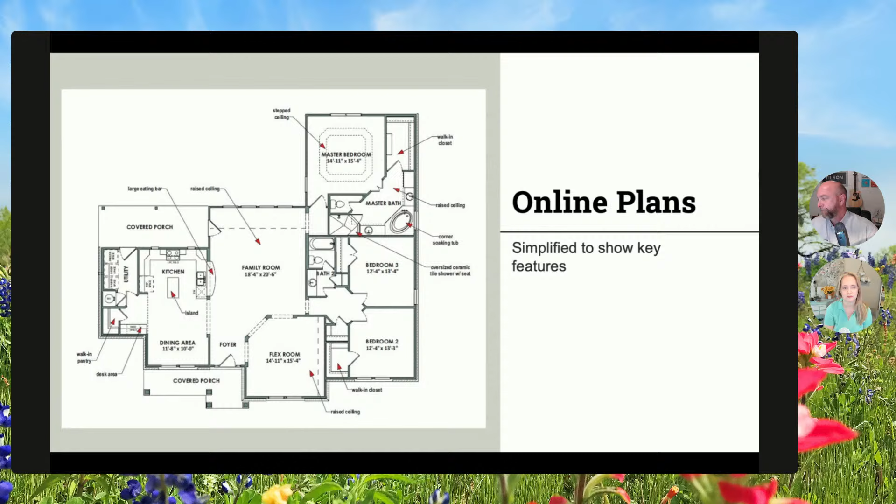Anyway, it's kind of a watered down version of a floor plan to keep it from getting cluttered, and you can still make sense of it when you're starting your journey and dipping your toes in. So you've got your callouts in there telling you all the special features.

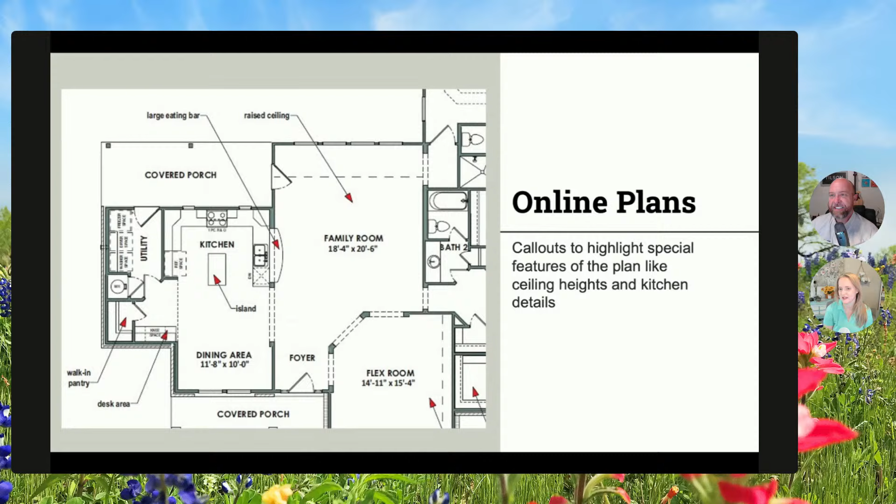Okay, so exterior walls. This is going to be true on any version of the floor plan you're seeing, but there's a little bit of a code to what those lines look like. If you're just seeing a solid black line, that indicates Hardie siding of some type on our plans.

Could be vertical siding, could be board and batten, but this indicates siding only on that exterior wall. Down below where you see the hash mark, that little diagonal mark, that indicates full brick.

That means from the bottom all the way to the top of that exterior wall is going to be brick. There's actually an extra ledge we place it on because we're using full-size masonry for that. The one below, where you see the little squigglies, that is full stone, differentiated from brick in this manner. That wall is full stone on the exterior, from bottom to top.

And then beneath it is how we indicate a masonry wainscot, shown as a straight line on that edge. What that means is at a certain point on the exterior wall, we switch over—starting with brick or stone at the bottom, masonry—and at some point on that wall we switch over to the Hardie siding, or it could also be stucco. This is indicating a wainscoting.

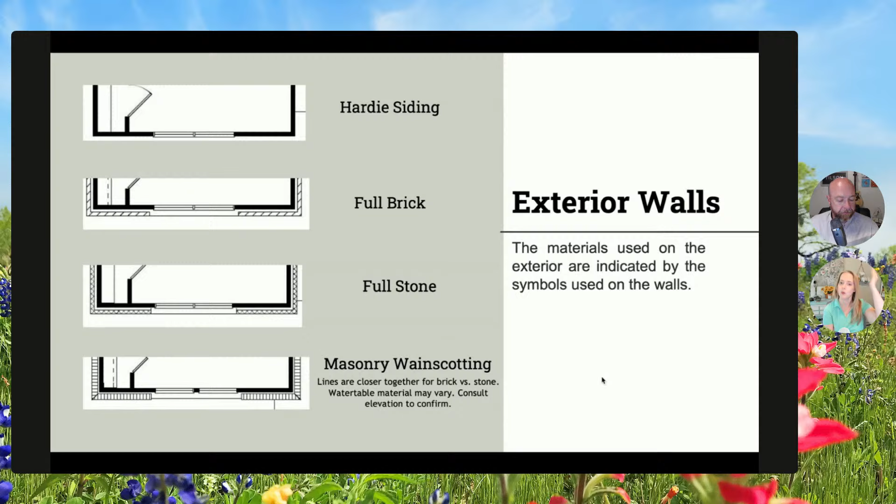So that's everything you'd see online. When you come into one of our locations, your consultant is going to pull out what we call the work copy—I think that's a more universal term. This adds in a little bit more detail. It's not something we send home with you for further review, because if it gets to the right person, they could actually start building the home off of these, so they are copyrighted materials. But this does give you more detail about what's going on in the floor plan, stuff we don't want to clutter it up with online.

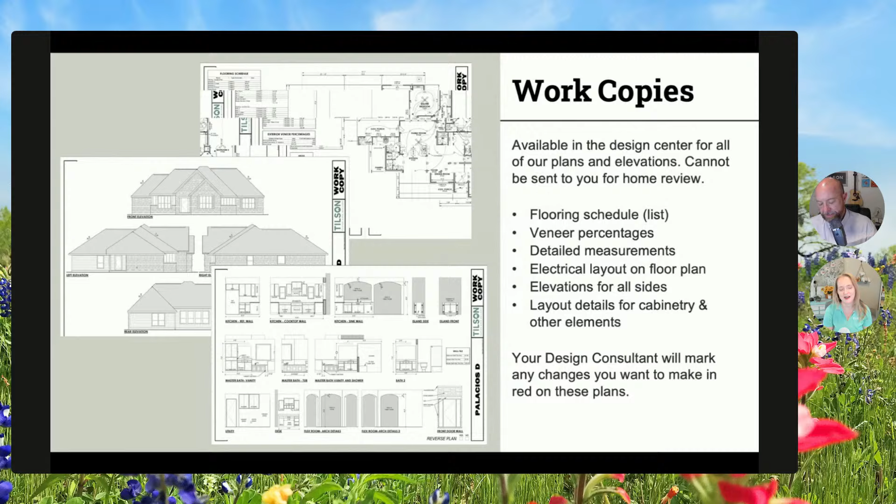So a little bit more detail. That flooring schedule I was talking about breaks out room by room exactly what flooring material is included in the plan.

It also tells you the square footage for each area, because we ultimately use these to order all the materials for your home. It's grouped by type of flooring, so everywhere that's carpet is listed together, everything that's ceramic tile is listed together. If you change that later and want wood or LVP, we'll separate those out as well.

The second thing you'll see is an area chart, telling you the square footage of the slab, broken out by heated and unheated area. The first floor livable area is the actual space within the home that is heated and cooled, the part within your HVAC. It's very antiquated, they call it heated and unheated, but those are the areas we're cooling, which you care a lot about in Texas.

We also break out the unheated area for this home, like the front porch slab and rear porch slab. If it had a garage, that would also be included, line itemed separately. We total up both sections and give you the grand total slab square footage. If someone asks about cost per square foot, ask a builder which one they're using—livable area or total slab square footage—because there's quite a difference, about 200 square feet if you add those porches back in.

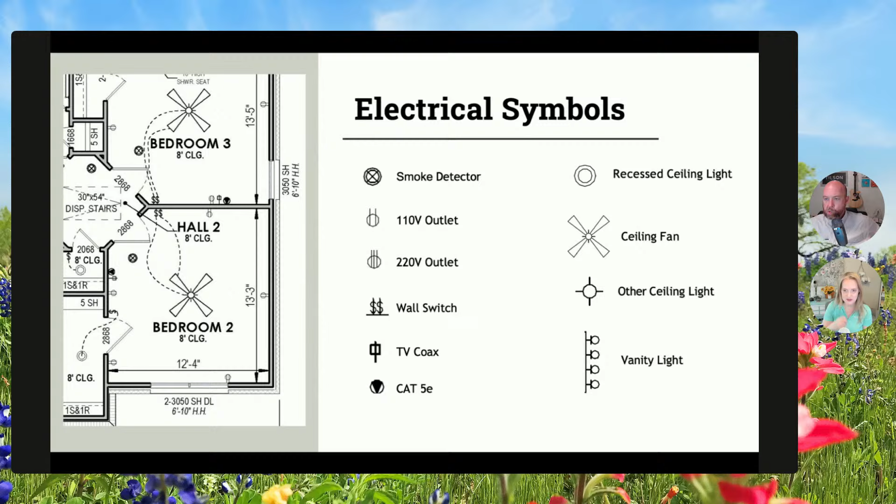We'll also indicate our vanity lights with that little indicator, and however many little circles you see shows how many bulbs there are in that vanity light fixture. Very cool. All right, windows.

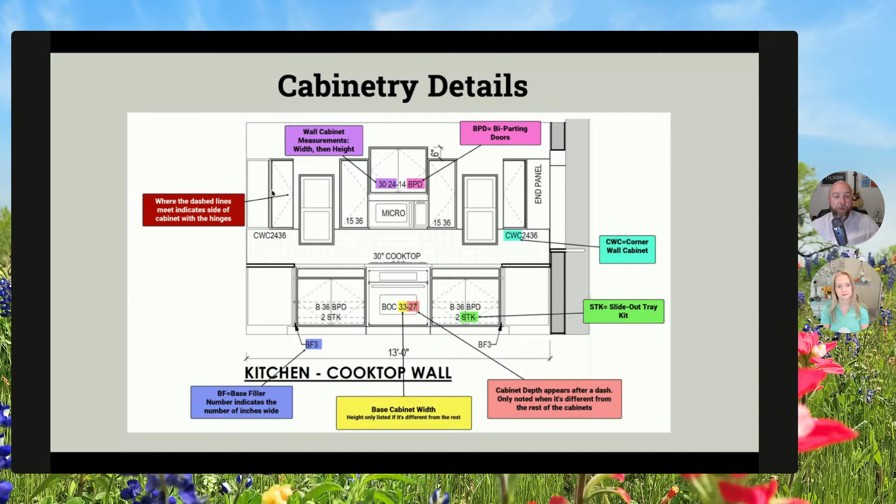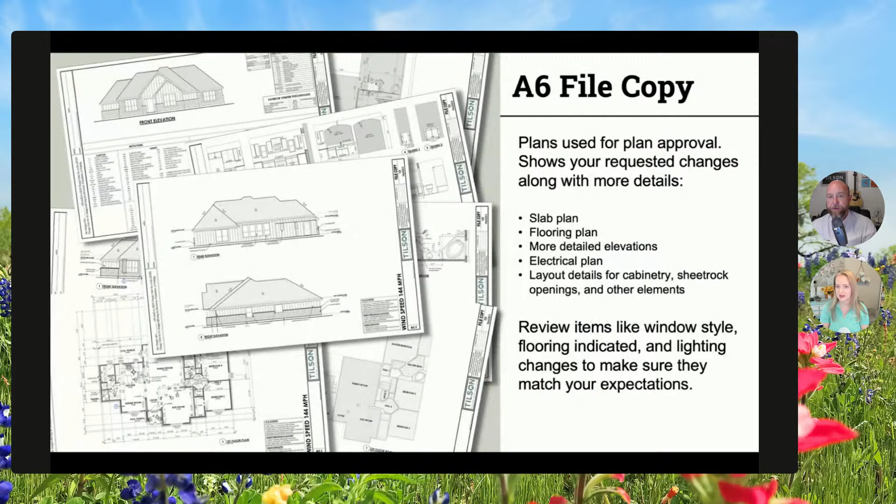Anyway, very, very helpful. Yes, lots of detail in those little designs. And I think we do have questions. Let's go see them. Give me a chance to switch to a window.

Let's see, we've got Michelle. She's got a question about arch windows: are they a specialty size? It depends, Michelle, typically yes. You'll see those listed as like a 30 CT, which stands for circle top. What that means is it'll be a 3 foot 0 inch wide window, not indicated like on the other ones, but it's going to be a circle top above the 3 foot window that's below it.

So if we had a plan that had a circle top window, I don't know that any of the Palacios does. I don't think it's this one. No. It's the B from way back. But anyway, so yes, they are special, but they're typically going to match up with the window width-wise that's below them.

And then she has the same question about arched doors, are they a specialty? Those are specialty, yeah, and they can't be used just anywhere. But yes, when we do see them used, it's typically a front door, I don't see them throughout a house. I did see one in a design one time where the architect, no offense to architects, this particular architect though...

It was a whole barrel ceiling, so the whole ceiling was arched to match the doorway, and the door was arched and it swung in, which means it hit, didn't work. No, luckily we caught it and were able to overcome that and many other design flaws. Won't happen to you at Tilson though. That's why we redraw all plans that you bring us. Exactly correct, yeah.

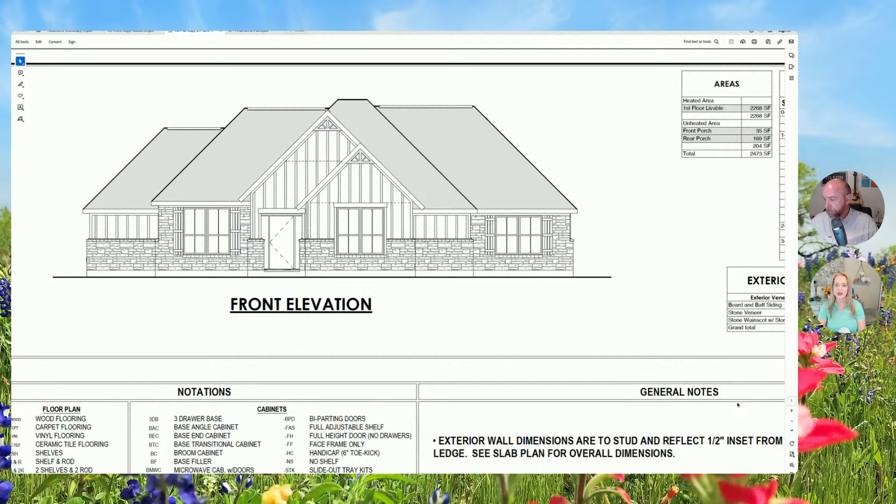Yes, so the next type of floor plan that you're going to see in our process after you've sat down with your consultant and you've drawn all over that A3 that I showed you is what we call the A6, which is the file copy. So it is basically the A3 that you saw before, just updated with all of your changes. And then we've added a few extra pieces of information to it to give a little bit more.

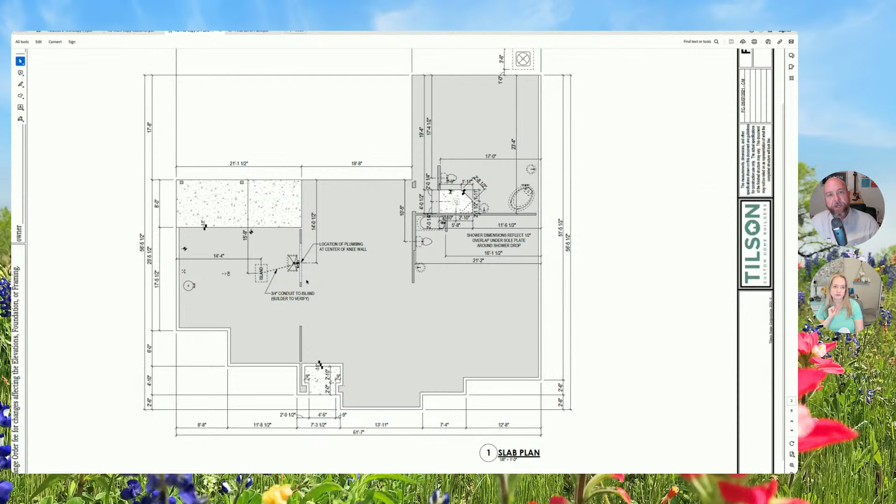So the first is this slab plan. Eric, if you want to talk. Yeah, so we'd be showing you, these are things that are going to be penetrations into the slab. So obviously you have the overall dimensions of the foundation itself, which is important. So you got the dark gray area, that's your main heated and cool living area of the foundation. These kind of lighted out checkmark areas.

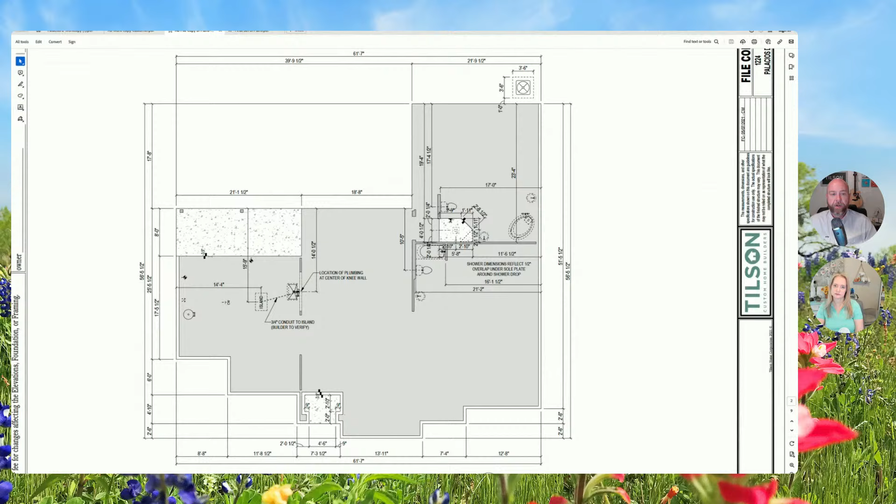So those are your porches, and actually in this case, the master shower. So any areas that are going to be dropped or a different elevation, that's this little double rectangle that's right here - see if I can zoom in on that, it's tough to see. But we're indicating that we are going to drop the slab here 3.5 inches. That's what this is telling you. So this is where you'd be stepping out, of both in this house, it's the utility room.

There's a door here, and in the family room over here, there's a door that steps out onto this beautiful back covered porch. Porches are designed to be lower than the living area of the house, and they slope away from the living area for obvious reasons, because it can get rained on. You don't want rain standing in against the living area of your house.

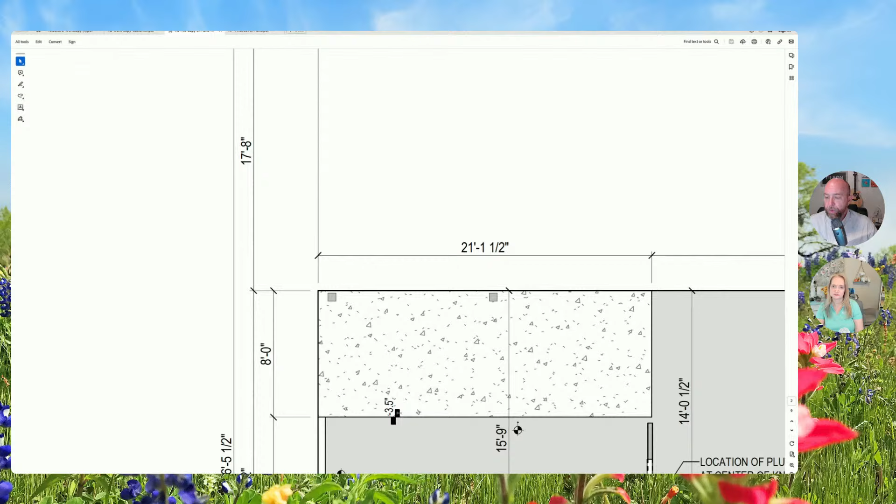So we'd be dropping anywhere you see two rectangles like this together, that indicates a change in slab height. So you can see it's here at the shower area, it's also here at the front porch. There's three going on here - that's because as the stone, or in this case, comes around, there's going to be a little stone underneath the threshold. So, but still a 3.5 inch drop from the living area to the porch.

And then there will be a separate detail for the shower itself. But this is very important to the foundation contractor. Any plumbing penetrations, obviously, the plumber's going to need to know exactly where to bring the drain for the sink up. So it's going to be 14 foot and 1/2 inch from the very back exterior wall, to make sure that it falls in the right spot, and falls on the same 21 foot 1 and 1/2 inch. Same thing for your island.

Your island's going to need electricity. You want to plug in there, right? So our building superintendent is going to make sure that there's some type of conduit run. There won't be power there yet, but we're going to run conduit that we can later pull power through. It's 14 foot 4 inches from the left wall and 15 foot 9 inches from the back. If we put a stub out there, we'll hit underneath that island somewhere.

And the rest are just indicators, same thing. You got a commode drain here, commode drain here. You've got a drain for the tub. So again, this is just important stuff as the forms are being set, that the foundation contractor, the electrician, the plumber, they're all going to need that information to make sure that it gets there.

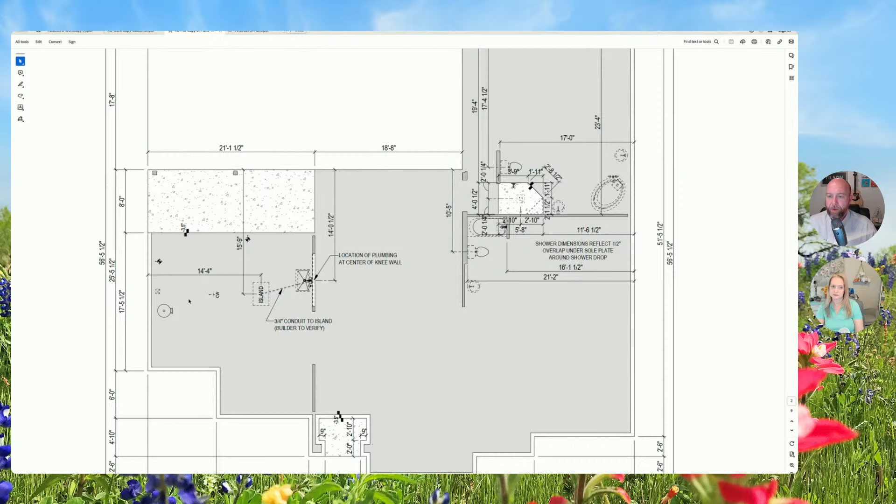Same thing, cold water stub. It's a little bit antiquated. We run those overhead now for the refrigerator, but anyway, so just letting you know how we'll be getting power to places and all that kind of good stuff.

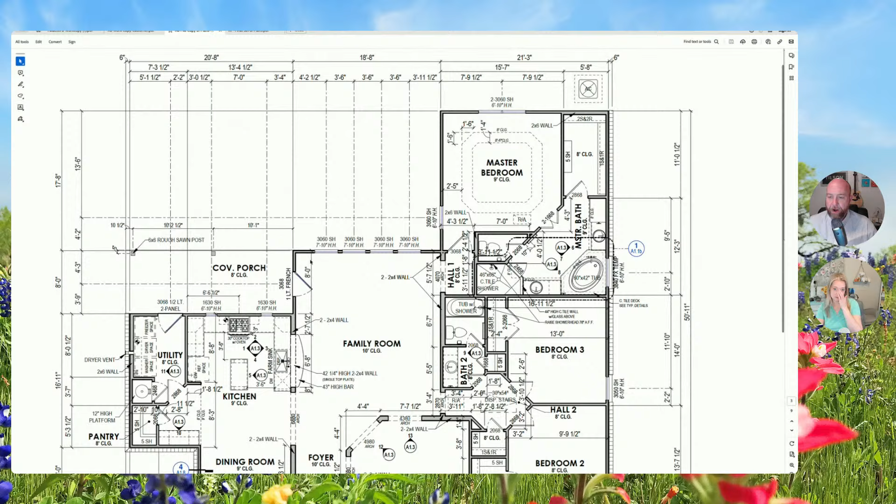So you've ever seen them start popping lines on a slab? This is what they're doing that for. And so these dimensions aren't really for the homeowner or the consumer themselves. Obviously, they're accurate, but these are really designed to be used by the trades, by your framers, by your roofers, by your sheetrock contractors. That's what these are designed to do, where one person can hang a tape on an exterior wall and drag that tape all the way over to where it's supposed to be, mark it, 18 foot 8 inches. So from the left side of the outside family room all the way to the interior wall here should be 18 feet 8 inches.

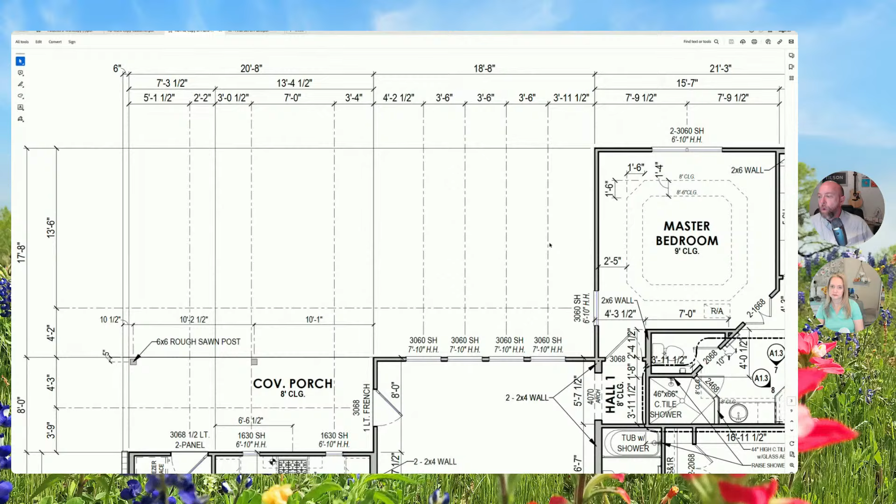Again, don't get too hung up on these or why they're different. That's part of what this video is. We're just explaining to you that it's going to be different. But it's for a different use. The work copy is for you and your sales consultant to literally kind of work through the plan. It's a working set of plans. It's not designed for any contractor to be using it.

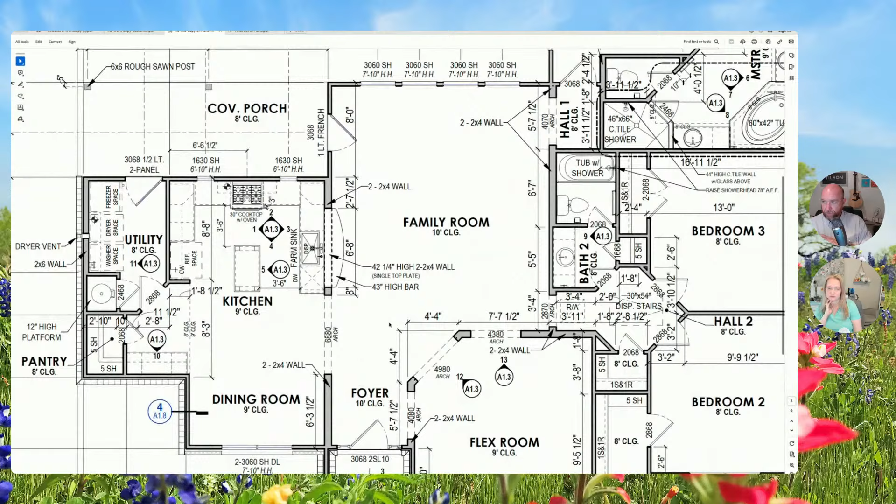Now, once we start to get to this file copy of the plan, that will eventually be what we call our K1, or the construction set of plans. Those are specifically designed to be used by the contractors for efficiency, ease of use, and clarity during the construction process. So there's a lot more detail here, which is why we split it up now.

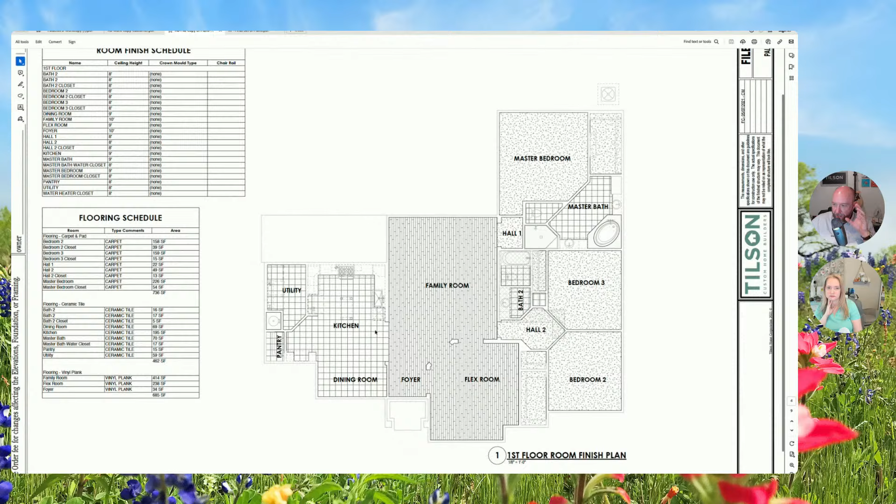We do show the flooring schedule. Let me zoom out a little bit. So now we're getting a little more detailed, even with the flooring schedule - hey, this is going to be vinyl plank through here. We're literally showing it differently. This is carpet, this is tile, so that there's no confusion. We've got ceiling and room finish heights called out, so again, there's no confusion.

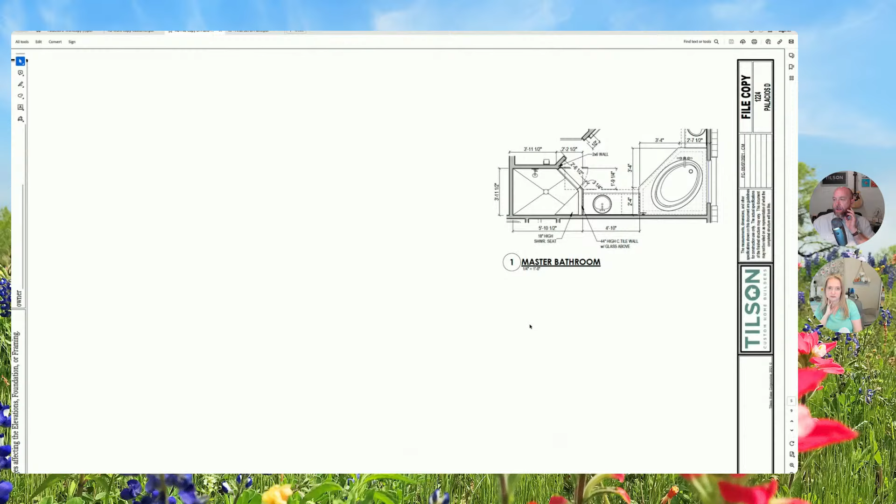So we give it a whole different page so that their eyes don't get caught up on all the other things that are happening. Very detailed cabinet detail, or cabinet elevation as some people call it, same thing. This takes you wall by wall through what the cabinets are going to be like, again with the dimensions like Don spoke to earlier.

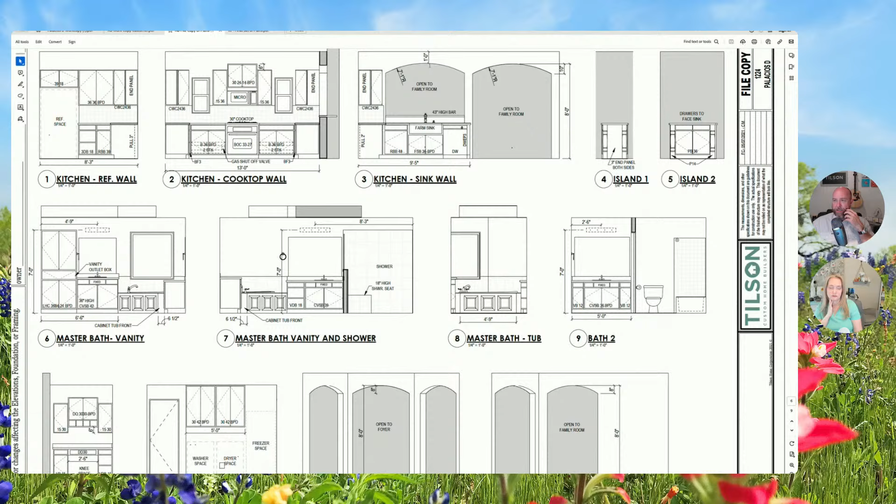We're also giving framers now, if there's an arch in the house, what are those radiuses to be. So this is a 7 foot 1 inch radius, and again of course it matches going into the family room. How far should the top of it be from the ceiling when it's done? Just giving some really good details to make sure that the plan we sold you is what you're going to be getting.

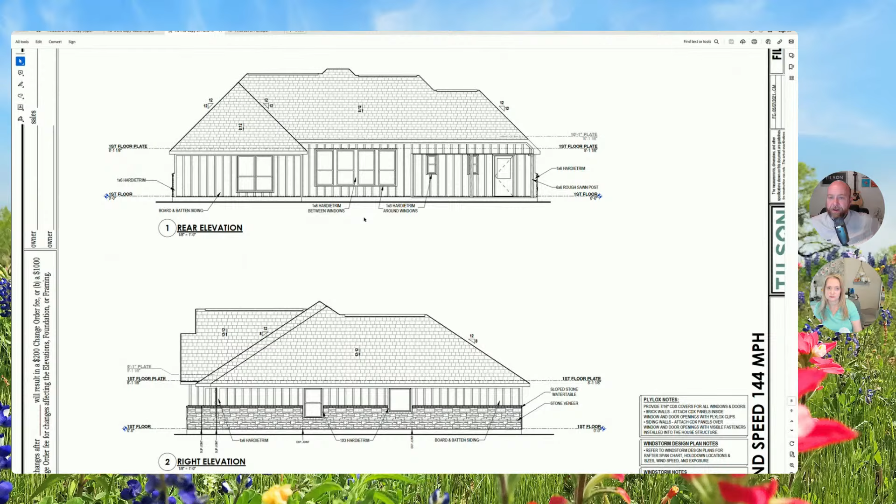So here's the rear elevation of the home, showing you your windows, your family room, and of course there's your utility room and kitchen. There's your kitchen here, utility room door coming out here. Here's that porch we talked about. You can barely see kind of where they do drop it, where you come out. And then of course the right side of the house.

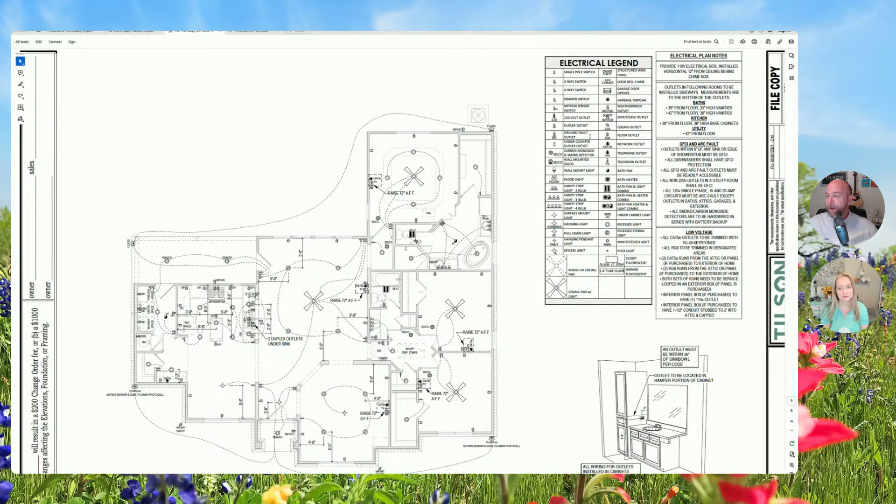So that again, this is for the customer, this is for the contractor, this is for anybody who's going to be rolling through here. It should be crystal clear on what's going in. Here's how we expect our outlets to go in a hamper if they need to. So again, we try to go out of our way to make sure that all the details are covered and that there's little to no confusion once the house goes to the field, because trying to chase down details when you have a contractor out of the job site in the middle of nowhere, Texas, is not fun for anybody. Yeah, so absolutely we try to minimize that.

All right, awesome. We've got a few more comments that have come through. Amy is saying, can you imagine a basement in the hill country? I can imagine it. I can imagine a walkout. Yeah, just finding contractors that will do it on the regular. It'd be better than a basement in the Gulf Coast, because that would be an indoor swimming pool. Way better. But I'd rather dig the one in the Gulf Coast. That's fair. Yeah, there'd have to be some blasting in the hill country.

And then we've got Kathy McDaniel saying, hey y'all, we are in our beautiful Tilson home and now sorting through years of stuff. Awesome, it's so important we keep all of our things with us. Yes, and Jason's right there next to her sorting stuff, saying, hey guys, moved in Friday and loving our Angelina. Thank you so much for everything. Our dream is now a reality. That's so cool, awesome, so happy for you guys.

That's awesome. And then we've got somebody over on YouTube asking, how much should I expect to spend on upgrades? What would be a good number to remove carpet and have wood floors, have nice countertops, wood front door, etc.?

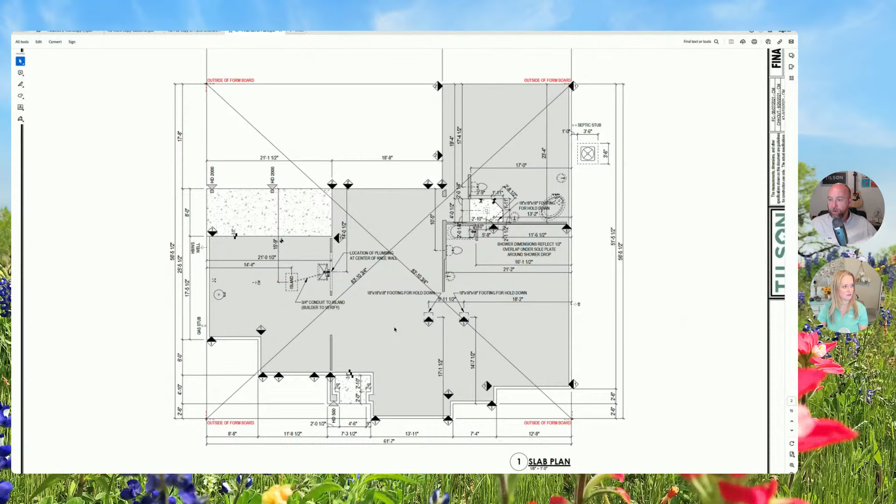There's going to be footings here for some hold downs. This is a little bit different because this house is a windstorm home, so I didn't mean to point that out, but you won't see hold downs on every house.

Just want to be clear about that. Okay, what else is different?

This is going to be very much the same. Again, we got the detail for the master bath so that it comes out correctly.

Not a lot of additional stuff here on the K1. There are some windstorm notes over here. Again, that has to do with where this home is being built. It's not going to be on every single plan, just want to be sure to point that out.

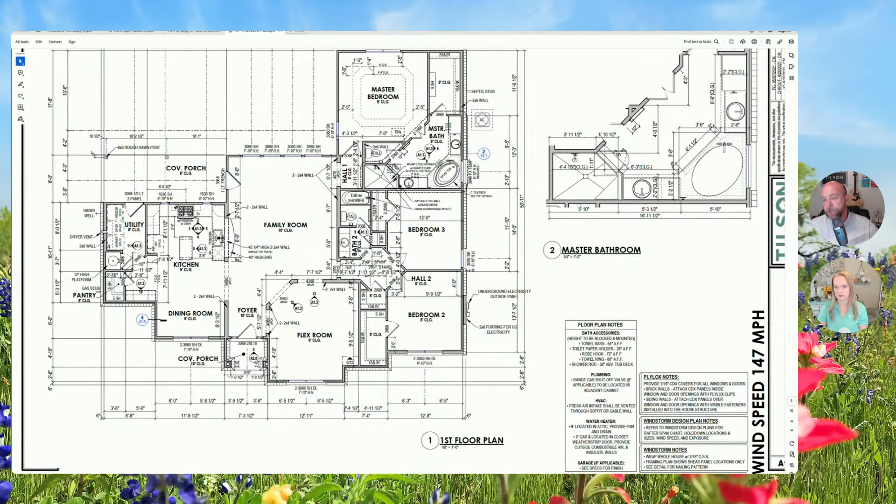These are counties that border the Gulf of Mexico, with, oddly enough, the exception of Jackson County. But don't worry about that, we still love you, Edna.

All right, so also on the K1 we do have some more roofing details. This is kind of antiquated now because we're no longer using ventilated soffit, since we're doing spray foam everywhere. We're not doing batt or blown insulation unless the customer requests it, but there are still details. Since it's a multiple pitch hip roof, the soffit widths are going to differ.

There's a whole different set of details that we don't include as part of the generic details, that are just for the contractors. That's what these numbers are referencing - there are detail sheets that show in quite literal high detail exactly how to cut the lumber to make these eaves work, to make the lamb's legs and all the different things that have to be done to make these roof pitches work out correctly. That's what these details are pointing to.

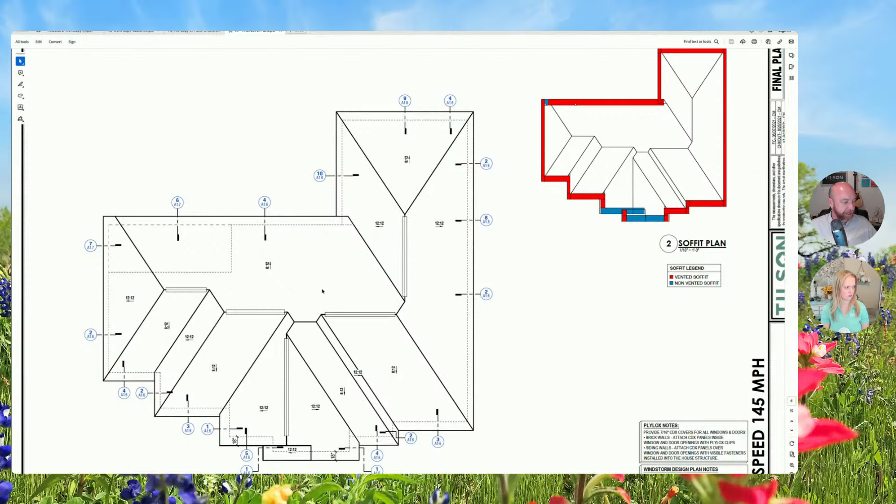Let's see, here's some examples of those. So this is an exposed rafter tail. This is a lookout, or what you would traditionally see like a soffit underneath there. This is known as a raked cornice, and this is just your normal cornice. 12-12 is just saying that this is for the 12-on-12 pitch, and down here would be more for the 8-on-12 pitch.

Again, different detail for masonry than there is for regular siding or cornice. This is not stuff that y'all would ever need to know or reference. You just need to know that we go to a lot of trouble to make sure that the French fries taste the same at all of the McDonald's restaurants.

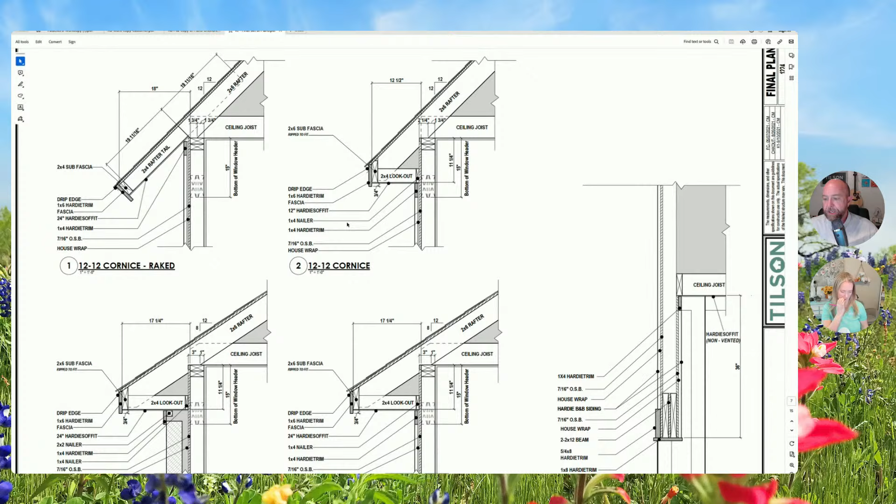It's important that because we ship a finite amount of material for these guys, we want them to be sure that they use it correctly. This is what this material is designed to be used for, so it's just showing you the order of things - what's supposed to be put on when and where, and all that kind of good stuff.

So again, lots and lots of details. This is how to do the step ceiling - that detail would be here.

Again, the goal being nothing is left to chance. You don't have any business going and getting a 12-foot 2x4 and cutting it up into 26-inch pieces. There's some efficiencies that we try to build in where you're not wasting large, expensive pieces of material. You can do this with scraps, literally.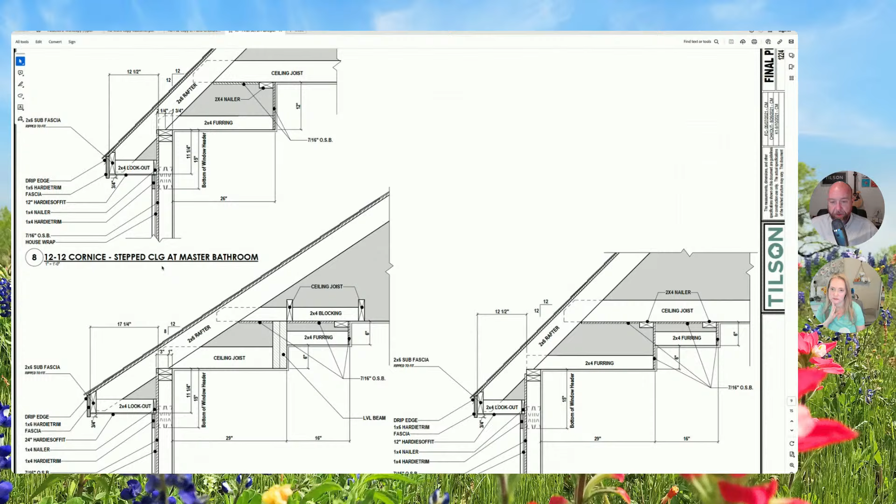You don't have to - it can be done with form boards at some time. You'll see that used for bracing in the attic or some of these little fur downs where you're doing your step up ceilings. You don't have to go get brand new material to do that.

More details here about the little gable bracket you saw on the front elevation, how far away it should be from the eave, all that kind of good stuff.

Again, the K1 is the true construction set of documents. You've got what size ceiling joists are going to be where - this is all your first floor framing detail. Again, it has shear walls. You wouldn't have that on every house, just what's going to be a windstorm certification.

But this is really just a color-coded template by pre-cut studs. So we will ship them 8, 9, 10, 11, and even 12-foot pre-cut studs. Don't cut the studs up - this is where they're supposed to be used.

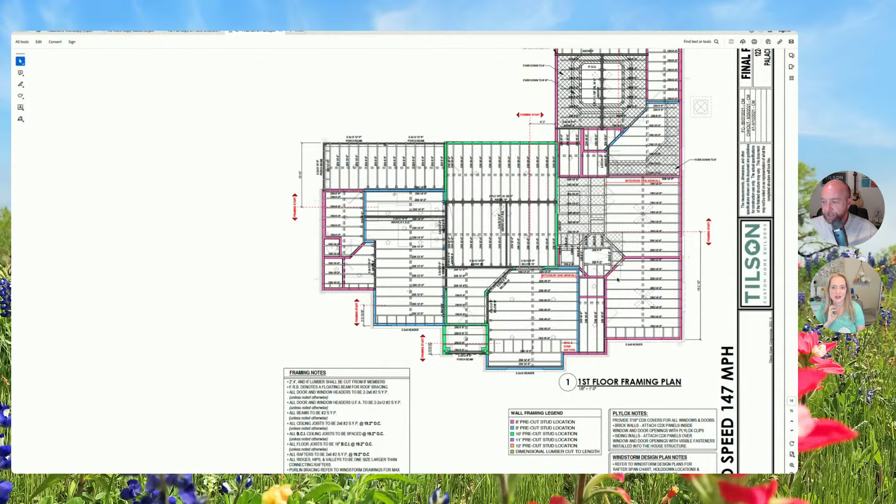It's like Legos, it goes together like that. Yes, it's hand built, stick built construction. It's not prefab, but the material is designed to be used a certain way. That's how we keep the prices as competitive as possible, so that we aren't going back to the well every time we need more material because we cut up the wrong piece.

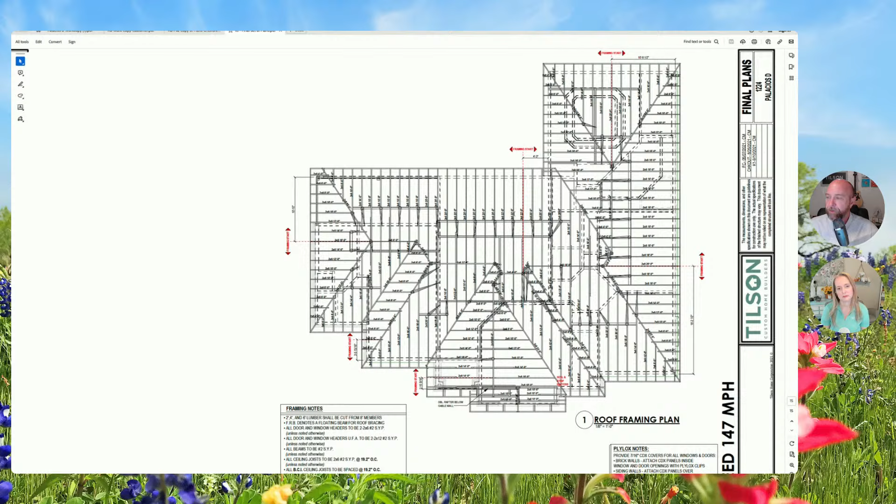Rafter detail, very similar, so it's all your roof framing. These are all your ceiling and roof rafters, and what lengths are what, how it should be cut up. We got some framing notes for them. So again, just a ton of detail that it's not really designed for the consumer, but it is designed for the end user, which in this case happens to be the framer, or the cornice folks.

So I think I may have stalled long enough to find this thing, but I have an eyeball price if you didn't. Oh, go ahead.

I went in the mini book because it's pre-optioned, so it's going to vary a little bit depending on where you're building and which exact elevation you're looking at for the Whitney, but you're looking at somewhere between 3,000 and 3,500 for the master bedroom to Cathedral ceiling. That varies by elevation. Same thing in the family room, actually the same swing there as well, depending on the elevation and where you're building. So you're looking at 7,000 to 8,000 total to do a Cathedral ceiling in both of those areas, the master bedroom and the family room, is what I'm seeing.

Cool, alright. Mary said she couldn't help us out because her price was 6.5 years ago, so it probably wouldn't be helpful. And TCAB says, you guys are awesome, doing these lives are very helpful and informative, I wish more builders would do this, props for you, and looking forward to building with you guys. Hey, thank you, thanks for bearing with us too. Thanks so much. I did find the price, by the way, it was just after Dawn did. Well, that's because I was looking while you were talking, so I did cheat. So was I.